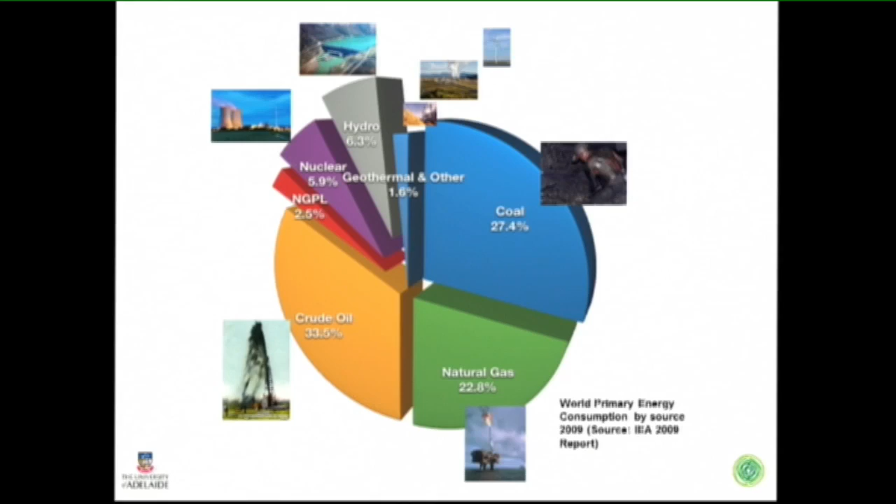This is a familiar picture of energy use worldwide. This is primary energy, with a range of sources, most of them fossil fuels - coal, natural gas and crude oil making up the majority. Nuclear is one of the larger, lesser components along with hydroelectricity. The question is, will that nuclear component stay the same? Many projections have it not really changing much over the next 50 years. Will it shrink due to accidents like Fukushima, lack of public support, or poor economic performance? Or will it grow, potentially very significantly?

This table illustrates two points. One, energy use is going to grow significantly in the next five decades or so, covering this projection from 2010 to 2060 based on some work I've done recently - probably around a 3.5-fold increase in electricity demand. Electricity will be the key component of that energy growth, because as a final energy source it's extremely flexible - you can use it to do many other things. If we want to decarbonise effectively, electrification is a really important pathway.

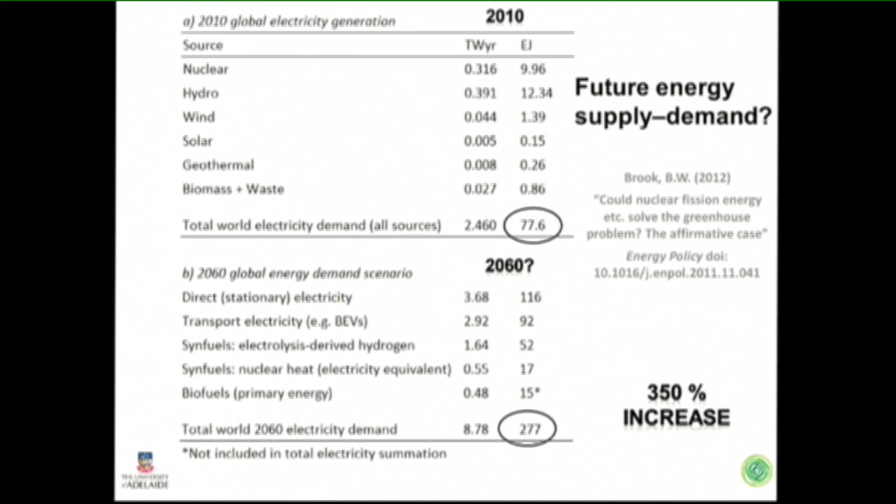The other important point is that electricity itself, although only a small part currently of our total energy use - around 20 to 30% in most countries - could end up being almost all of it, because it can be used to create synthetic fuels, run battery electric vehicles, as we've seen in other talks, and a range of services currently provided by fuels such as oil. If we're going to do that, that's where the huge extra demand in electricity will come from.

This is a projection for Australia done by CSIRO and the group involving Tom Hatton, in the first talk in this session. This is a scenario not typically shown, but generated by the eFuture model when you flick a switch and turn on the option to have nuclear energy, based on technological maturity and projected costs of electricity from current generation nuclear. The purple section is nuclear growth - if you flick that switch, first reactors at around 2025, around half of our total electricity demand by 2050. So that modelling for Australia, tailored for Australia, done in the last year, says nuclear is a viable option if we allow it.

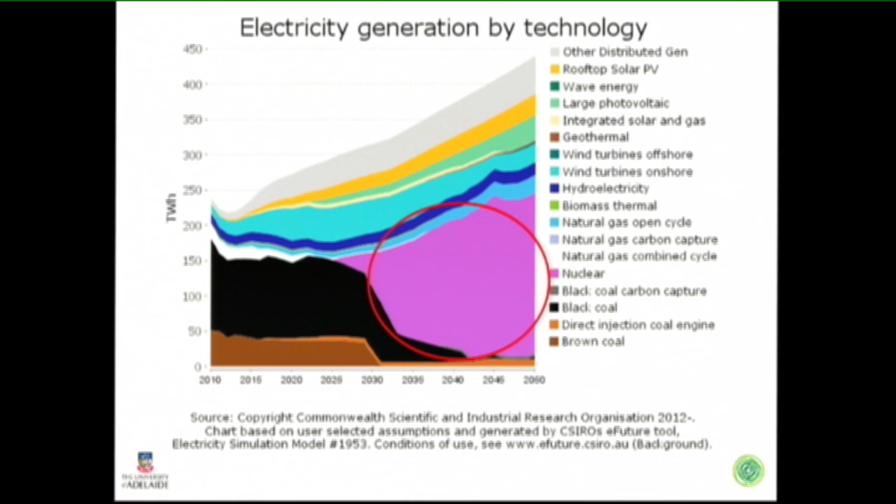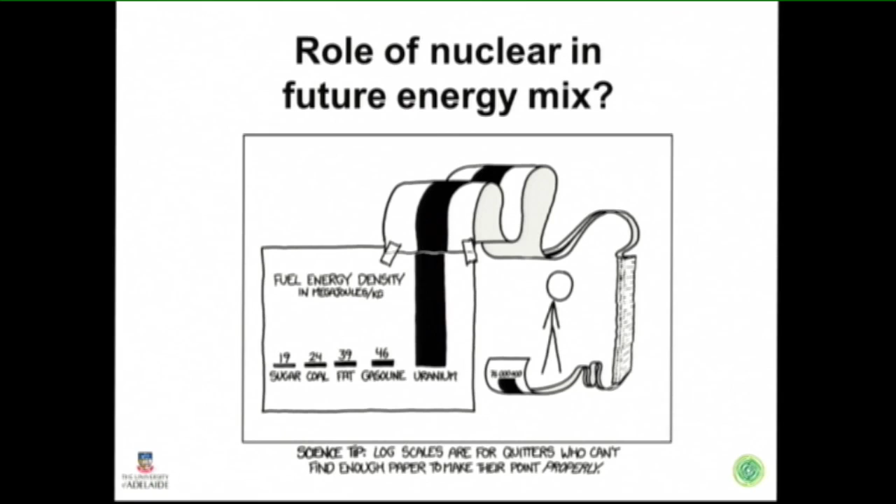What's the role for nuclear energy in the future energy mix in Australia and worldwide? It has a lot of potential, as that comic illustrates - an incredibly dense form of energy, millions of times more energy per unit mass than the chemical energy we can derive from fossil fuels, if we can harness it.

There are two types of nuclear reactions we ought to consider: nuclear fission, the traditional type of nuclear reaction we've managed to harness here on Earth, and nuclear fusion, which is what goes on in the heart of the sun.

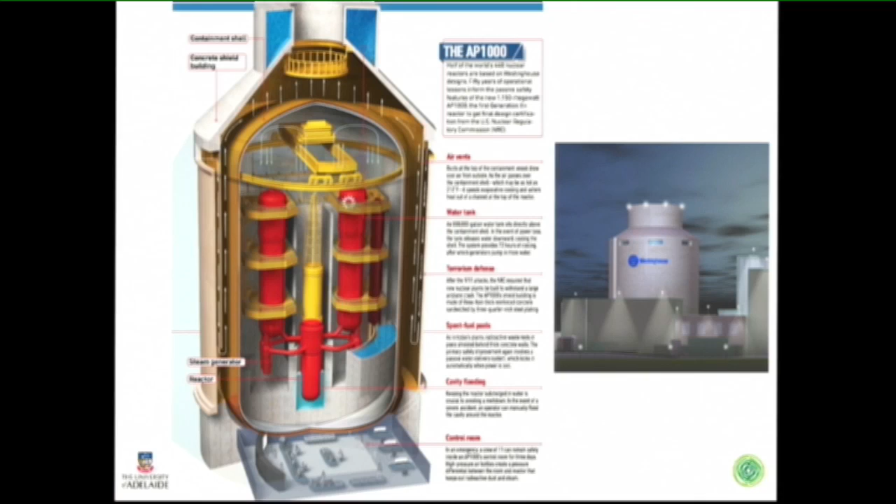This is a schematic of a typical ultra-modern nuclear reactor, the AP1000. Of the 28 reactors being built in China that Ziggy mentioned, four of them are the first four commercial AP1000 reactors - very large, what's called a light water reactor, using traditional oxide fuel, enriched uranium fuel. It has a huge number of safety features that the reactors at Fukushima didn't have, including passive cooling systems that would have allowed it to ride through a period of complete station blackout for around a week rather than around an hour.

So there's certainly big benefits in terms of that, and the cost of building them in China is hoped to come down quite significantly through learning by doing and scaling up the number of reactors we build. But that's not really the topic of my conversation today.

What I'm really focused on is Generation 4 nuclear energy and beyond, which isn't at the commercial stage right now, but some of the technologies are at a stage where they're about ready to be commercially demonstrated. Other ones are further back in that pipeline. And there are a number of other low carbon technologies mapped there.

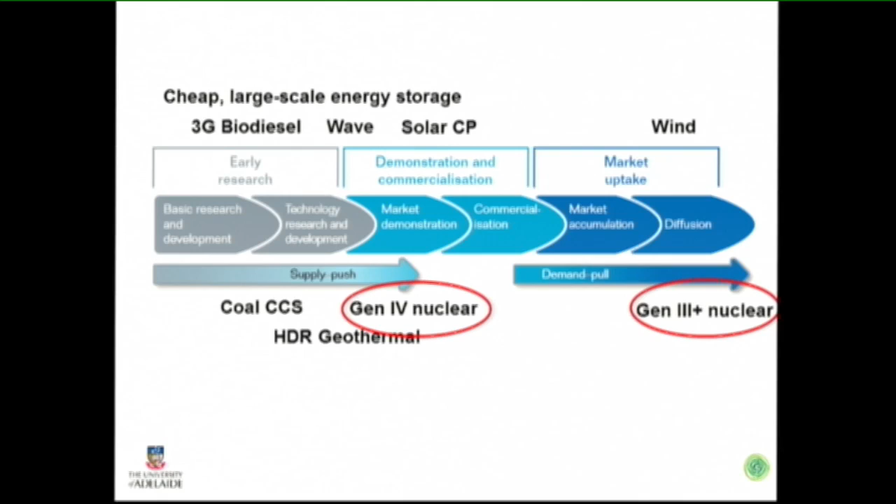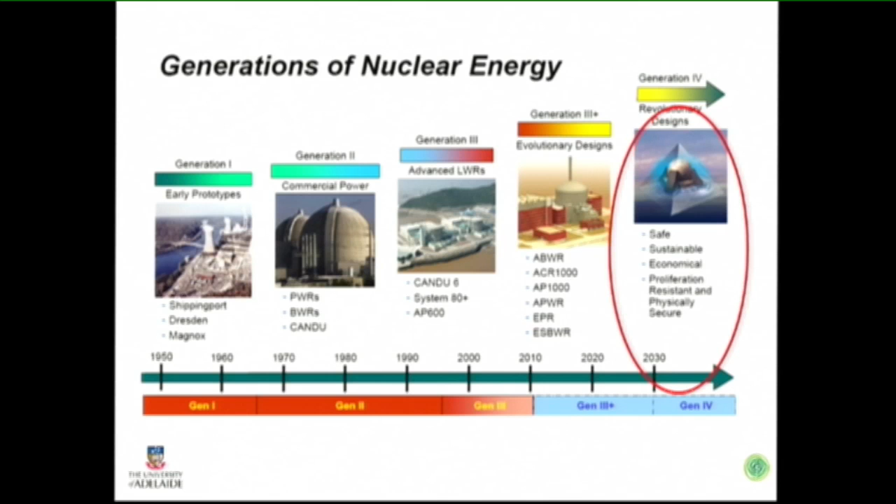So Generation 3+ nuclear, the most advanced current reactors today that are commercial, are what you could order and buy essentially off the shelf and know what you were getting. Generation 4 is what you could order in the next 10 to 30 years. So we're looking at these revolutionary designs, as they're called, whereas the previous generations were essentially an evolution of the very first commercial nuclear reactor built in the 1950s, just incremental changes.

Revolutionary designs essentially throw out the rule book and start again. And the great appeal of these Generation 4 reactors is that they really do set out to solve virtually completely the 4 big barriers that Ziggy talked about to nuclear energy: the potentially poor economics, the concerns about civil safety, what to do with the nuclear waste, and how to manage the proliferation risk.

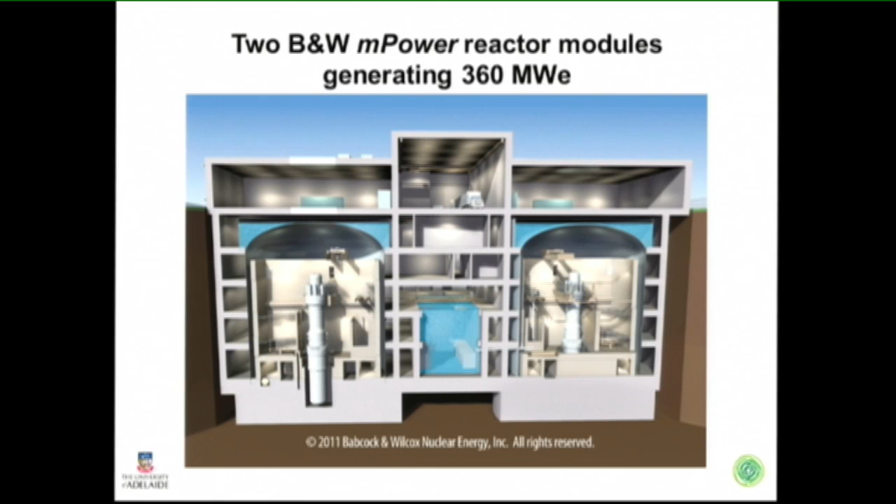You could see between the 2 reactors at the top compartment, there's a semi-trailer truck there, so that gives you an idea of the scale. These are actually considered small reactors, but in terms of energy density, they are relatively large. The reactors each producing around 180 megawatts of power.

Now, there are a number of inherent features in these that are potentially very attractive. They're small enough that you can build them in a factory, almost all of the components, so site-based assembly is relatively rapid. And because they're small, they can incorporate a number of passive safety features that mean in the event of a catastrophic failure, say of external power, some disaster, not only are they built below grade to protect themselves, but they're completely self-protecting in the way they can passively cool, essentially forever.

However, they suffer from a number of the disadvantages that current day reactors suffer from today, such as not a particularly good utilisation of the potential energy in uranium.

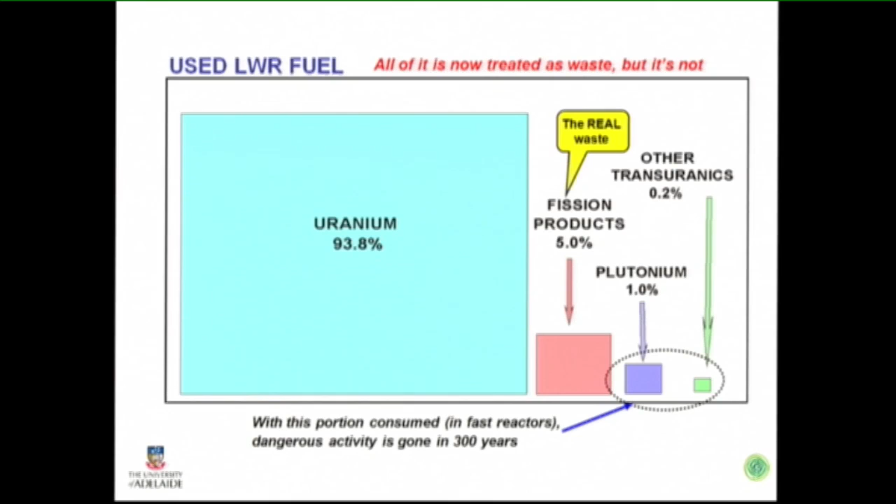So this is a breakdown of the major constituents of used light water reactor fuel when it comes out of a reactor after a cycle of about 18 months. What went in was essentially pure uranium, a mixture of isotopes. What comes out is mostly uranium, still around 94%. Around 5% of that uranium has been converted into energy and fission products, which are shattered uranium atoms, about half the size of uranium. About 1% of it is plutonium, and another 0.2% are other higher actinides - heavier elements than uranium that have been created, bred in the reactor, but not all of it consumed.

Now, what the 4th generation of reactors offers, the fission reactors, is to consume all of that uranium, just about 99.9% of it, all of the plutonium and all of the transuranics. So all that then remains is that fission product.

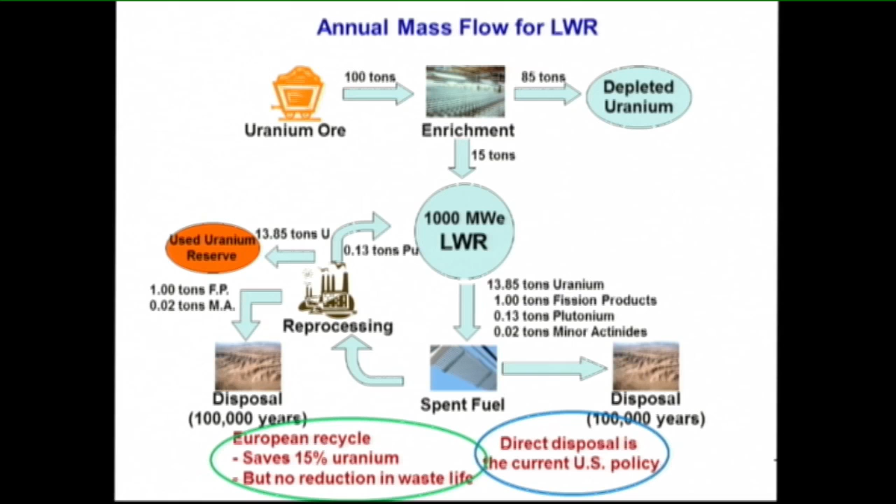So there are two possibilities for getting rid of this fuel at the end: direct disposal into a repository, or one cycle of extracting some plutonium to save about 15% of the fuel, then direct disposal with no real impact on the radiotoxic lifespan.

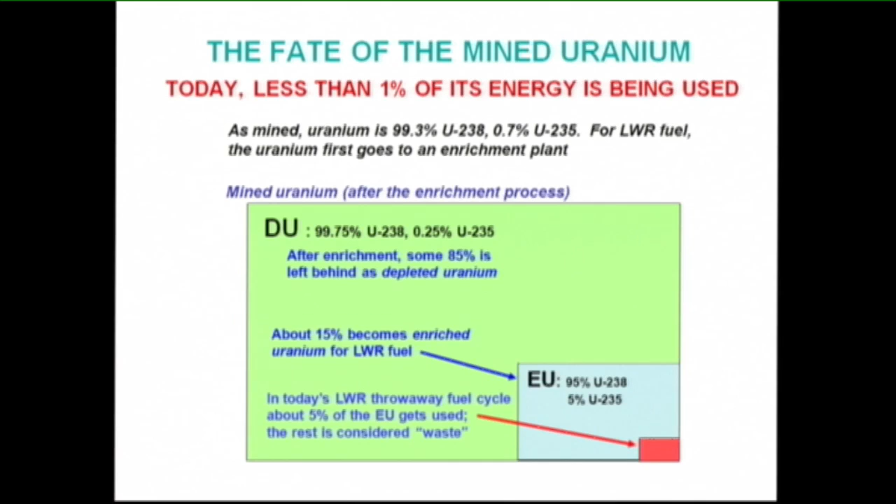This concept is a closed fuel cycle where it uses a fast reactor, and I'll explain a little more about that soon, to breed new plutonium and create a closed fuel cycle by then recycling that repeatedly.

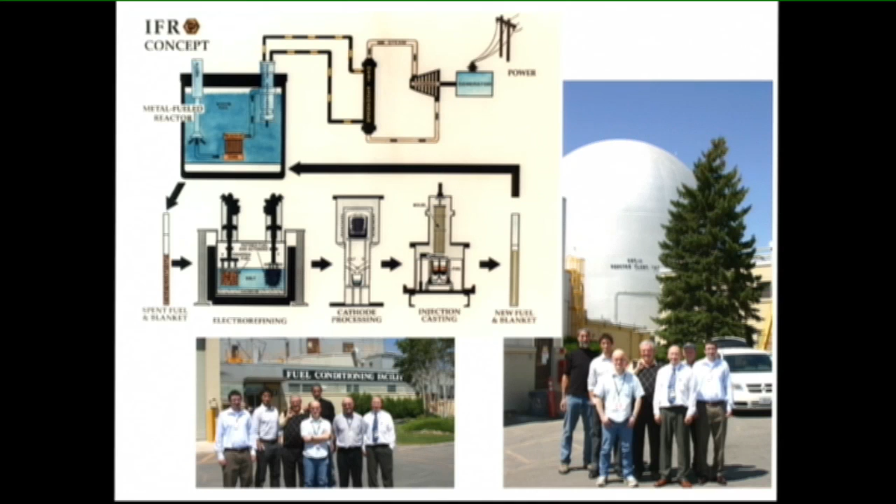So this is a simplification of what the reactor looks like. Instead of having water as a coolant, like today's commercial reactors, it has a liquid metal as a coolant, in this case sodium. It still has a heat exchanger, and it has fuel that consists of uranium and a large amount of plutonium and other minor actinides.

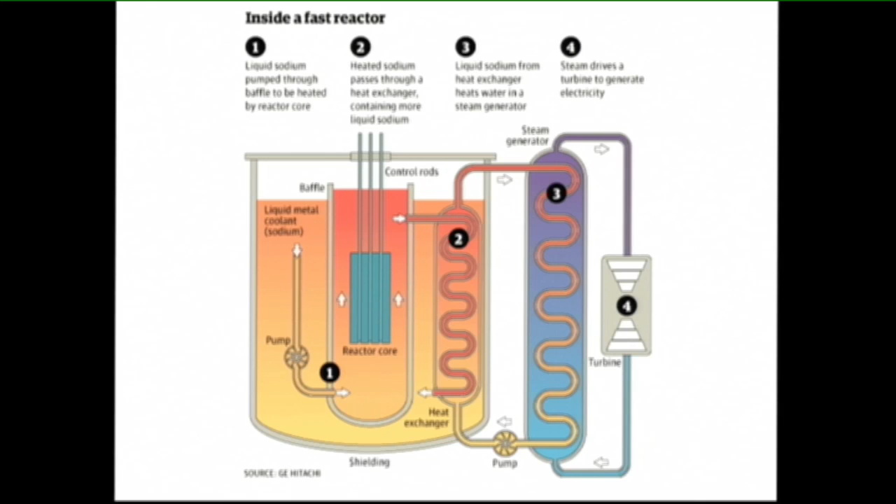But otherwise it's still a heat engine, it still produces steam. But it uses fast neutrons, and fast neutrons are important because they're the ones that can breed new fuel readily—in other words, breed other fissionable material rather than just non-fissionable material such as composes most of uranium.

Now there are a number of very special features about this type of design that was essentially demonstrated almost to completion at this reactor in the US. One of them is the use of metal fuel rather than oxide fuel, which has a number of huge safety advantages that I'll map out in a moment.

It also allows you to use a completely different type of recycling process. It's very tolerant of impurities. It really lowers the proliferation risk because it doesn't produce the type of material that would be suitable for weapons, and it's very compact, so it improves the economics of recycling hugely.

The biggest advantage, I think, about using this type of reactor is not only that it consumes all of the uranium fuel—which is very good from an energy utilization point of view, using up to 150 times more energy out of uranium than you would get today—but also that it's consuming all of the long-lived actinides. What remains, the fission products, is highly radioactive for a short amount of time, but then once you've managed them for a few hundred years, really they're not a problem anymore.

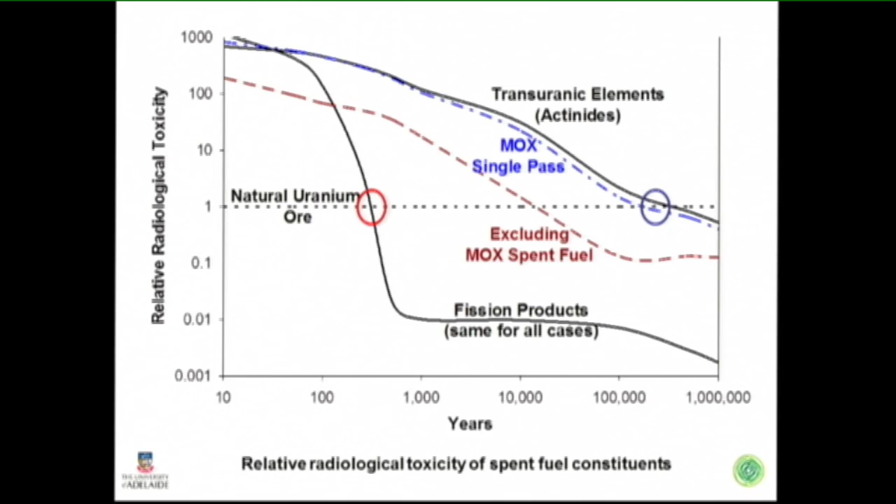So with today's reactors or single-pass MOX recycle, you're looking at around 100 to 200,000 years before that spent fuel is as or less radioactive than natural rocks around a uranium mine. Whereas if you can fully recycle the actinides, then you're looking at around 300 years until it crosses that convenient threshold of being less radioactive than natural uranium ore, which is quite low on the radiotoxicology scale.

So the type of fuel cycle for a Generation 4 nuclear fission reactor is more like this, where we have a one-time processing of nuclear waste. We take the waste that's already been generated from nuclear reactors over the past 50 years, create new metal fuel out of that waste, and then run that metal fuel through a next generation reactor and burn it up to produce vast amounts of zero carbon electricity.

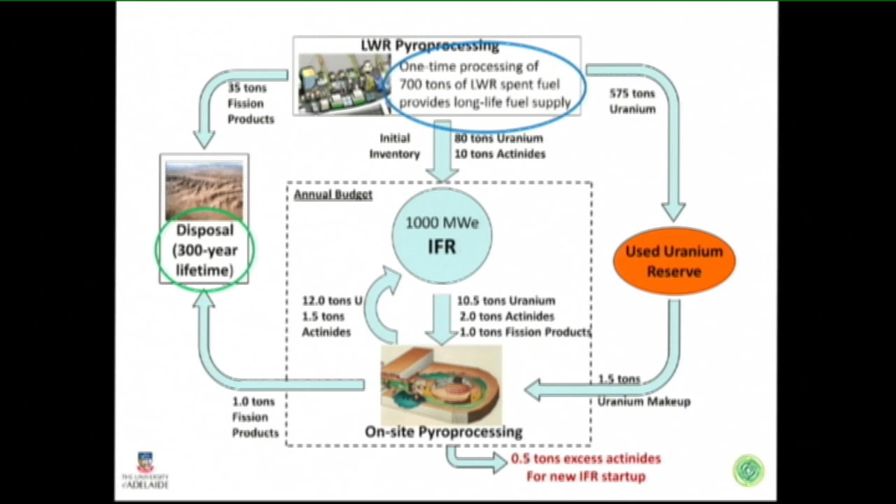We continually recycle, and what eventually goes into a repository is about 1/50th of the volume of the initial nuclear waste, and has that greatly diminished lifespan—one-time reprocessing of nuclear waste, and then a short lifespan of what remains when the new waste comes out of this reactor.

So an integral fast reactor like this, the exemplar Generation 4 technology, has got around 50 years of research and development behind it now. It has a number of features that distinguish it from today's nuclear reactors.

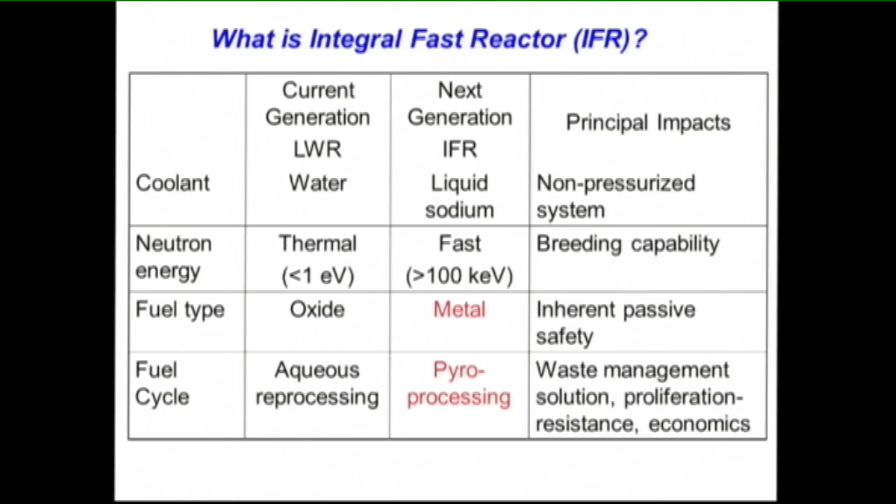The coolant type is a liquid metal rather than water, which allows for fast neutrons, which provides for breeding capability. This allows you to extract eventually all of the energy out of the uranium. It has a metal fuel which confers incredibly significant safety features that I'm happy to talk about in questions, and it provides the ability to use pyroprocessing to recycle that fuel, which greatly reduces proliferation risks, improves enormously waste management, and potentially is very economical.

Now there are other types of fourth generation fission reactors that are being discussed more readily. One of them, which you may have heard of, is a thorium-based reactor - in this case, the liquid fluoride thorium reactor. It's called that because a liquid salt composed mostly of fluoride salts is used to dissolve thorium within a fluid.

Then the reactor core itself, the fuel, is a fluid fuel within a moderated reactor. Here's a schematic of it. It also has a breeding blanket of salts containing thorium, where the thorium is converted into uranium-233, which can then be fissioned in the reactor.

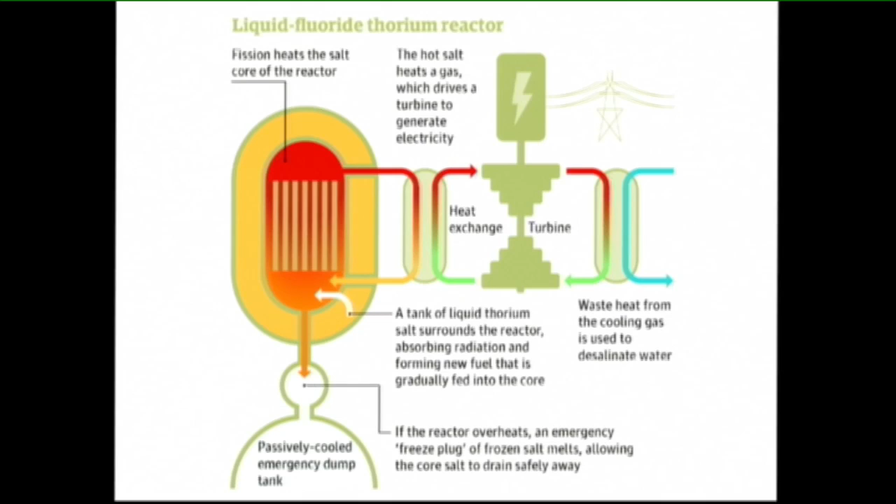This has a number of unique safety features. It's similar in its advantages to the integral fast reactor in that it can consume nuclear waste, albeit less efficiently than the IFR, but it can also breed enough fuel to keep itself going essentially forever. Thorium is also an extremely common fertile material, about 4 times more common than uranium. It has a number of major safety features that are of potentially significant advantage.

Then we have another stepping stone technology that's being discussed more readily in the last decade or so - fission-fusion hybrids. Now, why would you want to do this? I'll get to fusion reactors in a moment, but why would you want a hybrid between a fission and a fusion reactor?

Well, one reason is that a lot of the technology we've developed for pure fusion reactors already works, in the sense that we know how to do it. However, it takes more energy to run that fusion reactor than we get out of it, so in terms of a power source, it's not particularly useful.

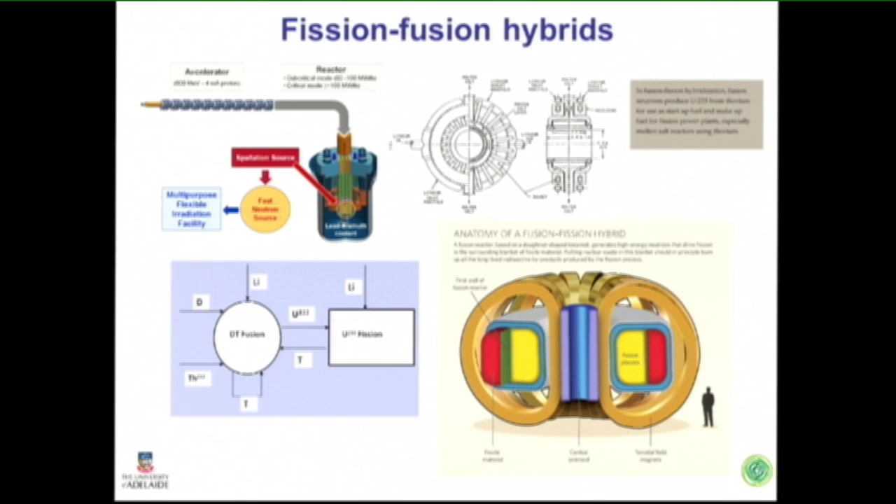However, one thing fusion does is produce a lot of stray neutrons. That's one of the potential problems to overcome, because it can cause damage to the reactor walls. But that's a potentially huge advantage if you wrap that fusion reactor with a blanket of thorium salt, because those free neutrons can then be used to breed uranium from the thorium.

So you create this breeder reactor out of a thorium reactor that's much more efficient than a standard thorium reactor. It's also potentially very attractive because in theory we know how to do the fusion component quite well, and we know how to do the fission component - so we just put those two together, and we've got a pathway to fusion reaction within a decadal timescale.

Then we move on to the idea of a pure fusion plant - a lot of people's ideal for a future energy source, trying to harness what's the equivalent of the power of the sun in a controlled manner on Earth. We know we can do it in an uncontrolled manner - fusion bombs are our most powerful bombs, releasing enormous amounts of energy - but can we do it in this controlled manner?

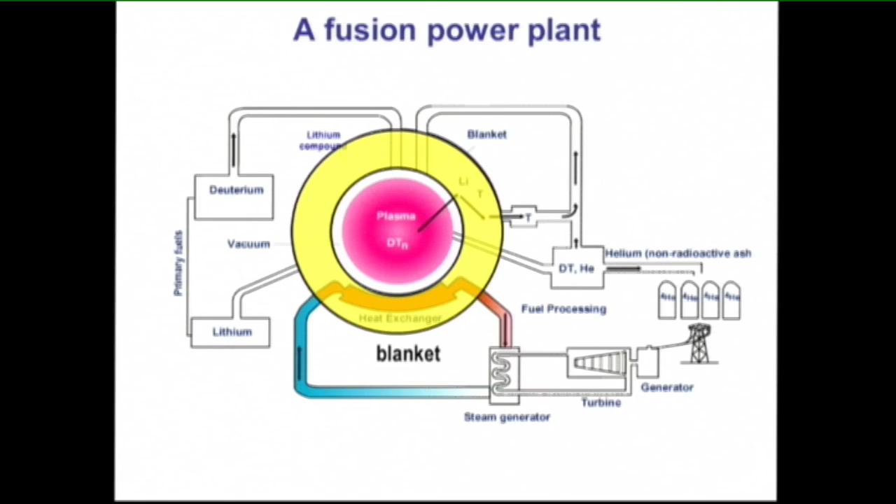The most typical fusion design proposed is where we use an isotope of hydrogen, a heavy hydrogen isotope called deuterium. We use the lightest metal, lithium, to breed another heavy isotope of hydrogen called tritium. Within that reaction, under extremely high temperatures and pressures, we fuse those hydrogen atoms together to produce energetic neutrons and heat energy, which is then collected to run a steam generator to produce electricity.

That's the theory. As for the waste products, there's some contamination of the power plant walls, but that's low-level contamination that's only a short-term issue to deal with, on a century scale. And we have helium ash - so maybe we can use that to float those airships that David King talked about earlier in the talk, because we'll have plenty of helium if we get this right.

Now, this is a practical big science experiment right now. ITER, the International Thermonuclear Experimental Reactor, is a multilateral big science experiment to prove a number of additional steps on the pathway to commercial fusion energy.

The size of the reactor is significantly larger than anything else that's been built to date, around 500 megawatts thermal. The aim by the end of the program in the 2030s is to have a power gain of greater than 10, meaning it produces 10 times more energy than you put in to control the reaction.

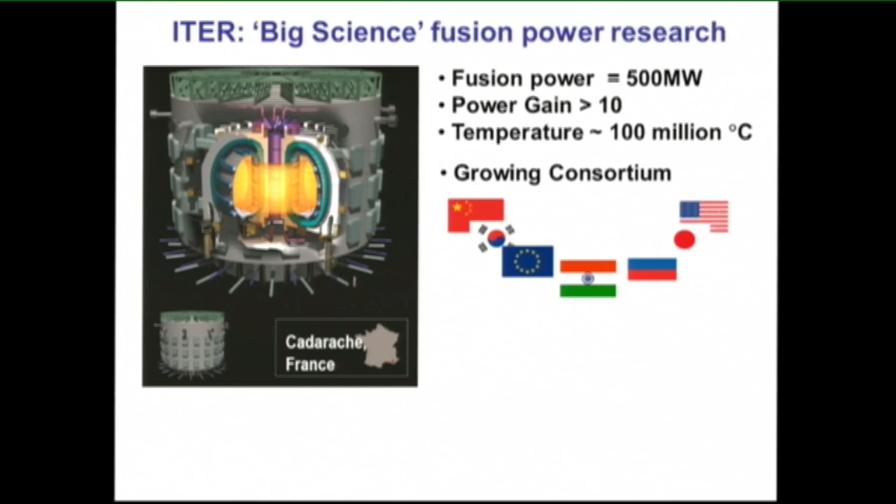To do this, you require extremely high temperatures, much higher than even the core of the sun, because the pressures are considerably lower. So extremely high temperatures, and to do that we need to constrain it within a magnetic field, because if you have temperatures of 100 million degrees, you can imagine any materials—we're worrying about materials issues at 1,000 degrees, and 100 million degrees is another thing to deal with.

So huge potential here, a big science experiment, multilateral collaboration between a number of major countries that are interested in developing this.

Around a 10-year operational program is planned. The whole thing, construction and operation, around a $20 billion project. So this is big science, indeed fiscally the world's largest science experiment ever undertaken.

The stakes are big because it's a potentially hugely abundant energy source alongside next generation fission energy, but the risks are high as well. I think David King this morning said maybe a 50-50 bet on whether we'll ever get this working, at least within a 50-year time frame.

My default argument would be we've got enough uranium and thorium fuel to comfortably last us for at least 50,000 years, so I would presume if we can't do fusion in a 50-year time frame, we probably can in a 50,000-year time frame. But if we can do it sooner, great.

However, some people are not willing to just settle on banking all of their money on big science projects like ITER. There are a number of companies, most of them smaller scale startups, working on the order of a $10 to $100 million budget rather than a $20 billion budget. They're looking at often completely radical ideas for controlling fusion energy, and some of them are illustrated here.

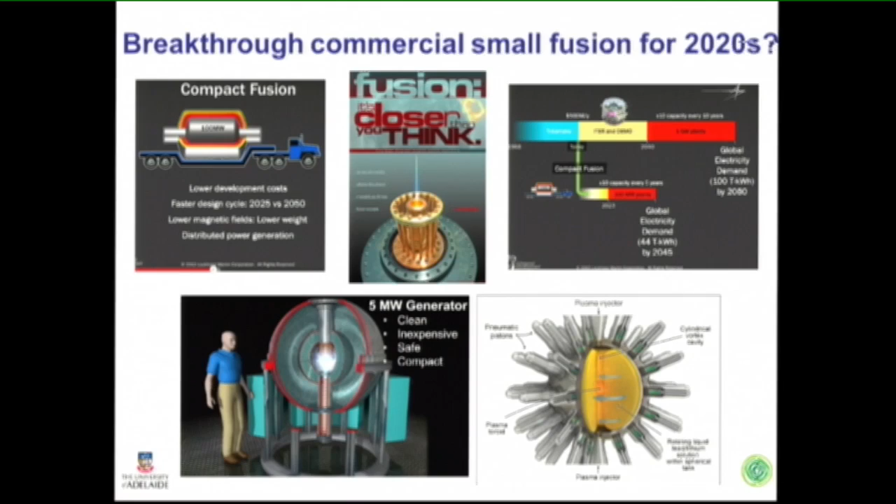Some companies that are serious about developing this include Lockheed Martin. So we're not talking about just some startups with no engineering background behind them, and they're proposing development cycles on the order of 10 years, where they said we could have a commercial breakthrough in small fusion in the 2020s, which could completely bypass the timelines proposed by the ITER program.

Now, I haven't got time to explore the plausibility of some of these programs, but there are enough of them going on, at least half a dozen, which have attracted enough serious entrepreneurial investment on the order of $10 to $100 million to be worth considering.

Some of them funded by the US Navy, others supported by NASA, Lockheed Martin and so on, and others supported by private entrepreneurs. We only really need one of these to come off and we've got an incredible breakthrough. And again, my position is if they don't come off in the 2020s or 2030s, then we have fourth generation fission or fusion-fission hybrids which look extremely attractive too.

Now this is important not just from the perspective of the techie world of nuclear energy or the idea of just providing electricity. Energy is a fundamental part of our entire economy, our entire civilization. Energy is effectively the ultimate raw material, because if you have abundant, clean, cheap energy, there are so many things you could do.

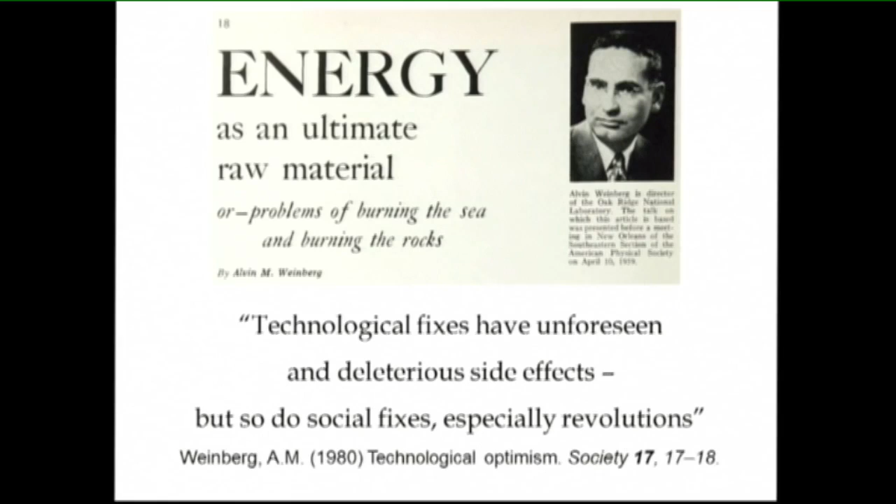Not only in terms of developing human society, but also in reducing our impact on the environment, because much of our impact on the environment is due to our inefficiencies in the way we produce food plants, build our cities and our transport networks and so on. If we can have access to this super abundant and cheap energy, then potentially technological fixes to these major problems become realistic.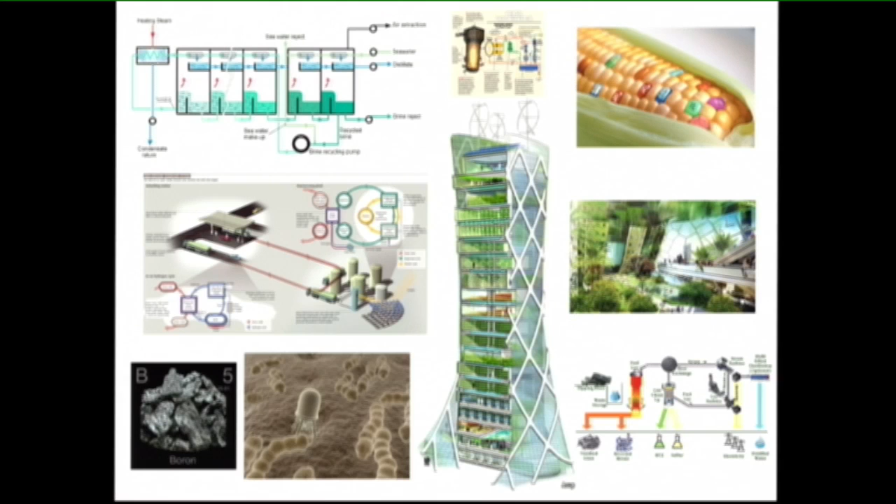So all of these types of proposals that are out there in the minds of futurists, but often at the bench scale already or beyond in terms of demonstration, for revolutionary technologies in terms of new transport fuels, new ways of producing agricultural production in urban areas that would require large energy and water inputs but hugely reduce our footprint on natural lands in terms of agricultural production, ways of fully recycling our municipal solid waste, recovering metals that currently go into landfills and so on.

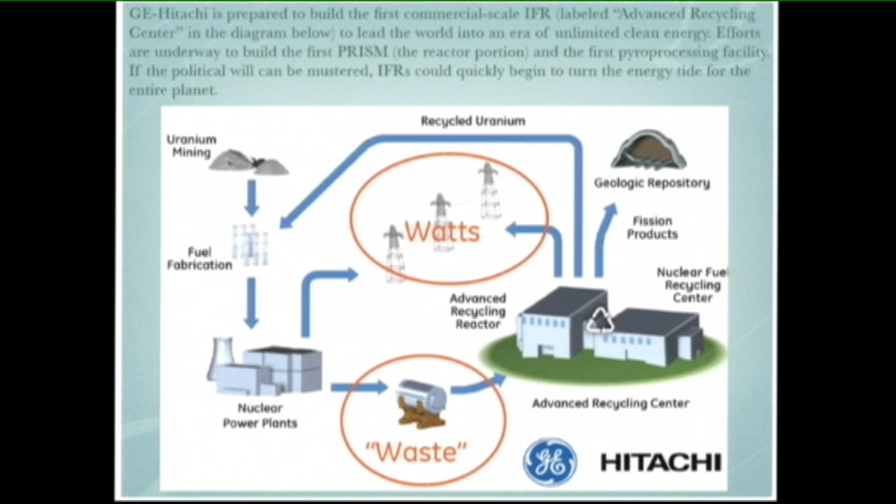So my vision for the next 50 years is to have a diverse energy source, to have major growth in renewables, but also to get serious about large-scale deployment of clean and sustainable forms of nuclear energy, which involve the transition from today's modern nuclear reactors through to advanced fission reactors and potentially advanced fusion reactors, such that a large portion of the future energy pie is not fossil fuels, it's in fact nuclear and renewables.

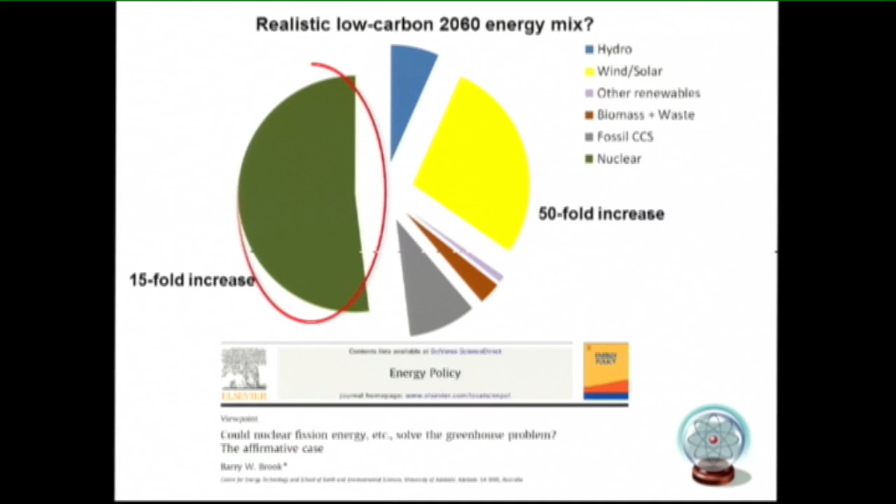A 15-fold increase in the amount of nuclear we have in the future compared to today could take up half of that total energy demand, which includes not only electricity, but our ability to produce synthetic fuels, essentially to do everything that our modern economy in 50 years' time would demand. Renewables, an expansion to a quarter of that would require around a 50-fold expansion. I expect that's probably a reasonable target to aim at too.

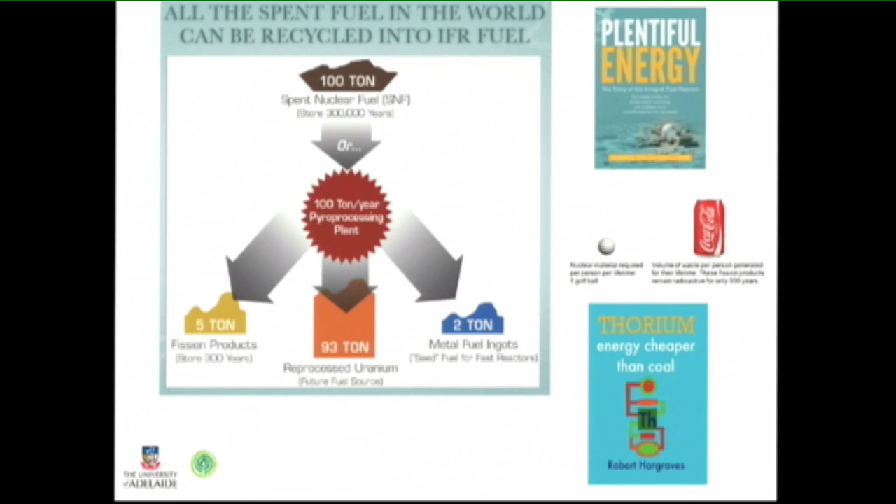So the vision for the future is to pursue a number of promising advanced fission technologies whilst deploying the very best light water reactor technologies we have today, moving towards the small modular reactors and trying to get some of the most promising next generation reactors deployed and commercially demonstrated as quickly as possible so that we have that plentiful energy. I put it up there as a book written just in the last year about the technology of the integral fast reactor. There's another book there about thorium, with the emphasis on energy cheaper than coal.

Because if we can get next generation nuclear, which is an extremely concentrated form of energy, to a point where it's cheaper than coal, we won't be building coal with carbon capture and storage, we won't be building coal in any significant amount, because we'll have cleaner and cheaper alternatives.

Take-home message: nuclear fuel is so dense that a golf ball sized lump of uranium or thorium would be enough to provide all of your lifetime energy needs, including all of the production of synthetic fuels, the production of agricultural produce in those vertical farms, everything within a golf ball of uranium for your lifespan, which is a very small footprint compared to, for instance, the impact of fossil fuels as they have today.